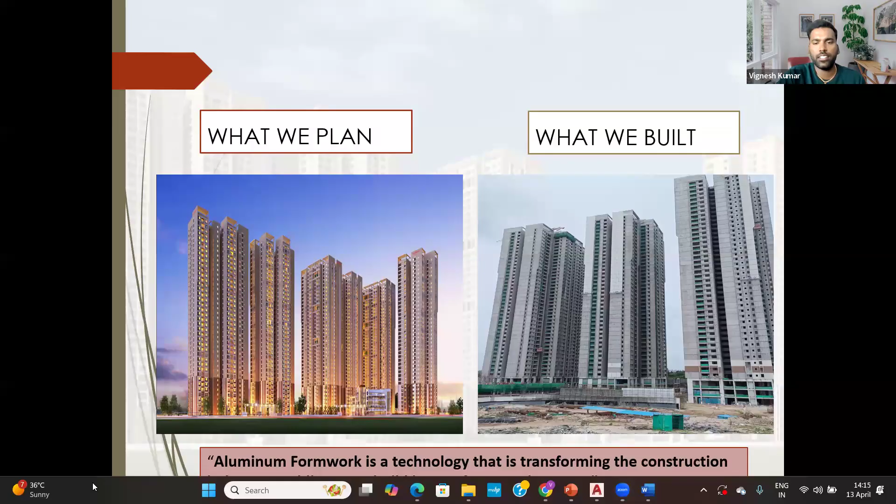About aluminum formwork: the aluminum formwork system is known as a monolithic formwork system. In a monolithic formwork system, we can do the walls, beams, slabs, and staircase at the same time of concrete. In conventional formwork, you do the wall or columns first, then the beam, and then the slab and staircase separately. But in aluminum formwork system, you can do everything together, connecting the whole floor in a single shot.

It provides good precision, consistency, and durability, meaning the panels are fixed sizes, so there are no deviations in dimensions, and you get a product as received from the panels. Aluminum formwork is also eco-friendly for sustainability. It gives around 200 repetitions for a single shot, and we can get maximum repetitions, which is the main advantage of aluminum formwork.

They are lightweight, which makes them easy to transport and install. In the market we have steel formwork, plastic formwork, and conventional formwork, but compared to those, aluminum formwork is lightweight, around 21 kg per square meter nominally. That's not a big weight for the workmen, so it is easily installed and used in an easier way. Aluminum formwork is an alternative solution to conventional formwork for sure.

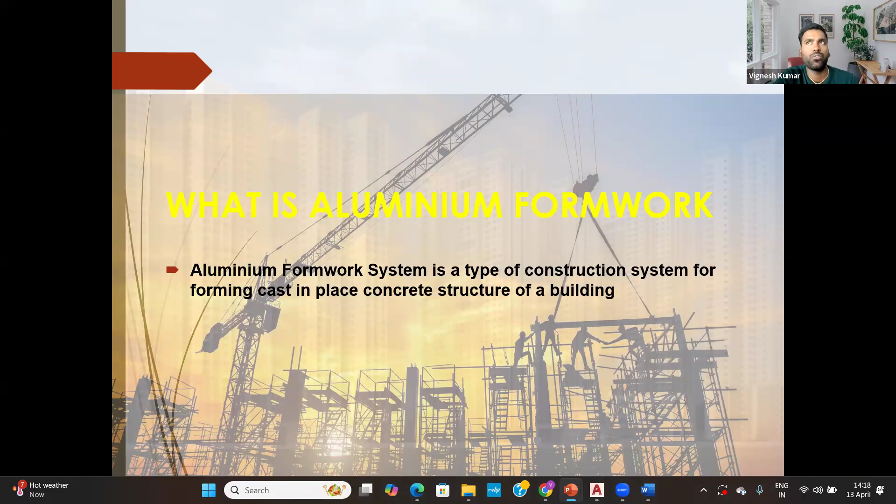If you are doing a high-rise building, it helps you complete the project faster and in an easier way. This is the definition of aluminum formwork: it is a type of construction system for forming cast-in-place concrete structures of a building. We know formwork is a shape or mold which gives the structure its shape.

These are the main factors for deciding on aluminum formwork. Number one is cost saving - nowadays, whenever management is asked, the first point that comes up is cost saving. The second is high speed, third is superb quality, fourth is safety, and last but not least, eco-friendly. These are the main five factors you can carry forward in aluminum formwork. If you provide cost saving and high speed, the balance two points - quality and safety - will be covered if you do it the right way on site.

In the cost saving factor, we can get 200 times of repetitions since all panels are molded, so you don't need any changes. The second is high speed - if you are doing a project with a 3-year span using conventional formwork for a 30-floor building, it will take 3 years for RCC itself.

So when will you do the finishing works, and when will you hand over to the customer? For that, aluminum formwork is the best alternative to complete the project at a fast pace, because nowadays people need everything on time or before time. That is a main factor among Indian customers or NRI customers - they expect the flat to be handed over before the time. That is the current market in Hyderabad, not other cities.

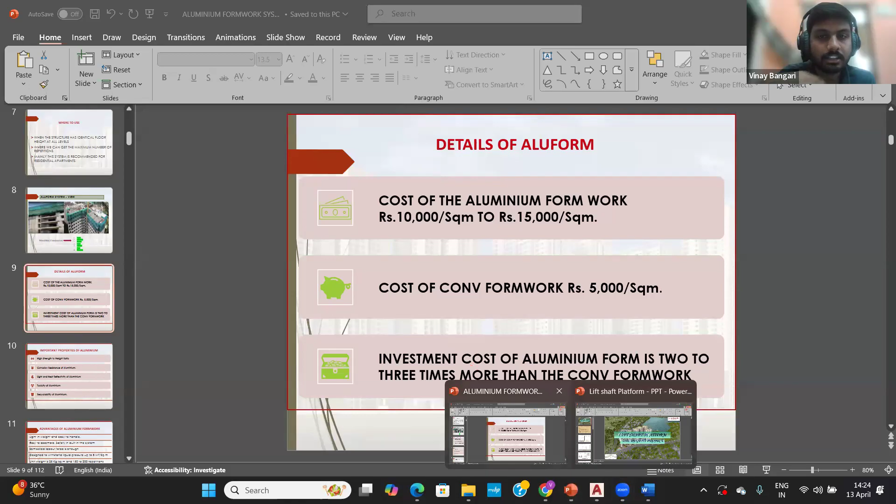Can I leave? And again, no, sir. No, sir. Only screen sharing. You can, okay. Stop the screen sharing and you can share it. We have to edit the settings. So done. Now it's gone. Yeah.

And the important properties of aluminum are high strength to weight ratio, and you don't get any corrosion. If you are using a steel formwork, there will be a factor of corrosion, and there is a fear in the rainy season, monsoon season. But you don't have any issues in aluminum formwork because you can work in monsoon time itself, and it's light with high reflectivity. Aluminum is recyclable, so we are helping eco-friendliness and sustainability as well.

So firstly, we covered advantages of aluminum formwork. These things we have already discussed: light in weight, easy to assemble. And the third factor is the main factor in the aluminum formwork industry: you don't need many skilled labors. In a group of 10 people, there will be 2 or 3 main carpenters. As per my project experience, out of 10, 2 persons will be skilled carpenters. Other than that, they are semi-skilled or unskilled workers only. That helps you to get more productivity with semi-skilled labors.

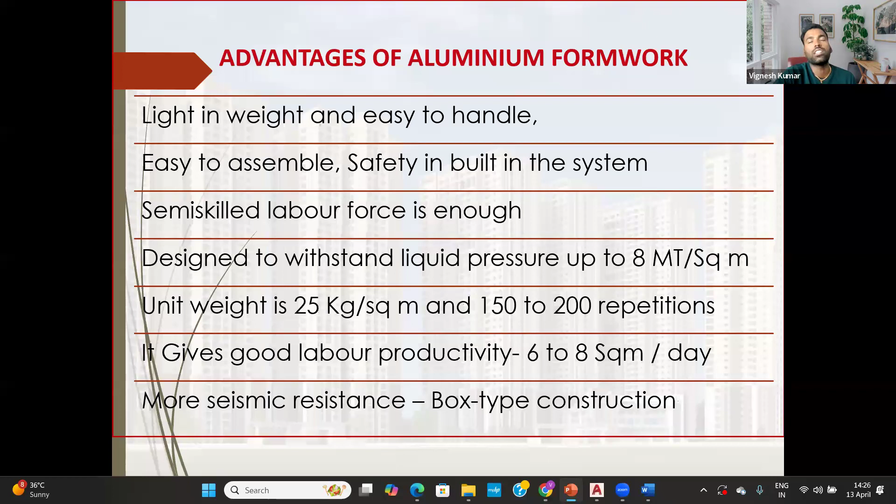And the initial setting of the formwork will take 30 days. It is between 20 to 30 days, based on your team, your technical crew, as well as carpenter crew. So we normally mark 1 month as the duration for initial setting, and the procurement will take 3 to 4 months because it is a time-taking journey. I'll share in upcoming slides what the process of procurement is.

So this is the first one, mobilization, what we call procurement. Firstly, we have to finalize the vendor because there are n number of vendors in the Indian market as well as the foreign market. In the foreign market, we can say Malaysia and Korea are the topmost providers for India in aluminum formwork, and we have n number of Indian vendors as well. The vendor is to be finalized as per their performance and reputation in the industry. If you are in Hyderabad, you can visit any of the builders. There is one name, MFE from Malaysia. They are the number one provider of aluminum formwork in Hyderabad city.

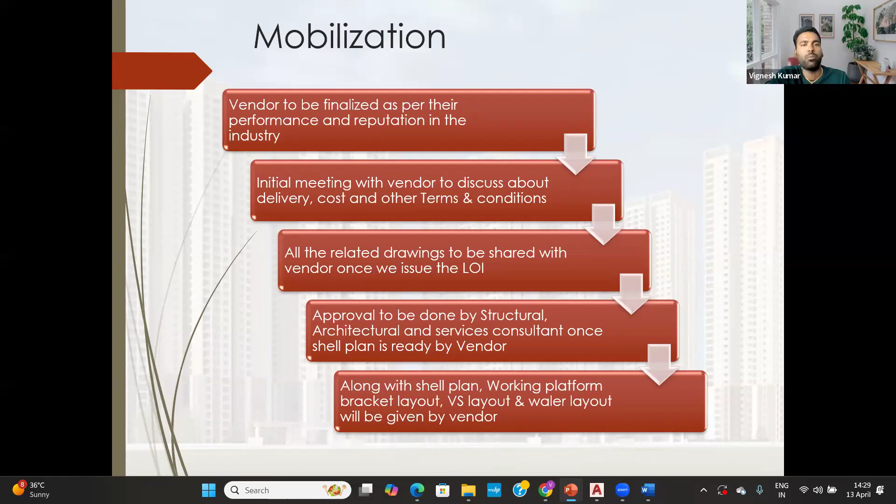Shell plan is nothing but a layout similar to a structural layout: wall thickness, beam sizes, slab sizes, room to room sizes, door and window sizes, all marked in the shell plan. After the shell plan, it has to be approved by our technical team, our architect or structural designer, who are the design drawing authority. If you have a CEO who is the design and drawing authority, he has to approve.

Then only they start the production of aluminum formwork. That's what I shared, it takes 4 months time. So you have to meet the vendor, you have to finalize the drawings, then only he starts the fabrication of the panels for your particular project. Those will be packed in boxes. Means if you have 8 flats, it will be packed flat-wise.

This is my project's mobilization data. Material shipment details from vendor factory to origin site as follows. The vendor, MFE, has a factory in Malaysia. By road, they shift it to the port, Port Klang, Malaysia. And then from Port Klang to Mumbai port it will be shifted by ship. This takes the maximum time because of the ship.

You don't know the weather condition, you don't know the ship arrival time. If it's supposed to come in June, it may come in August. It may come in May end also. So that is the factor you have to think about before starting the foundation itself. You have to procure your aluminum formwork for a typical structure. And then from Mumbai port to Sanath Nagar, Hyderabad, and Sanath Nagar to project site.

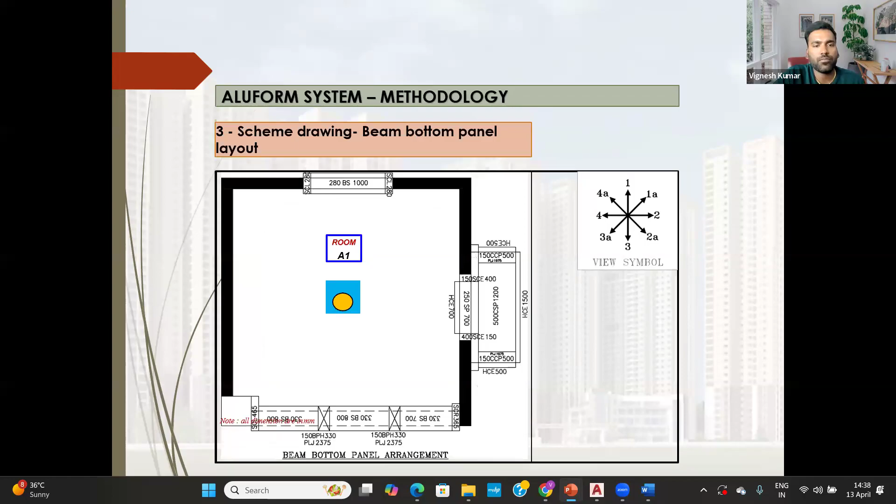This is the wall panel layout. This is for beam bottom, and this is beam side panels. So you provide full wall panel here, and full wall panel here. Here is the beam. There is a window. So you are providing a beam bottom for the window and the beam side for that window, so there will be an opening for that window. And again, this is a slab panel layout. Here, this is the soffit corner.

I'll show you that identification later, because you should know the drawing first. Only then can you know the components. Without knowing the drawing, simply knowing the system and the components will not work. Engineers working on site, in planning, projects or PMC, you should understand the drawing first. The first thing you have to know is the drawing. If you know the drawing, you can face, challenge, and fight for anything. Okay.

And this is the slab panel layout. This is not required. This is the bracket panel layout; we'll come to it later. So this is the section. I'll show you slide number 1. From here you are seeing. Everyone, please focus on the slide. You are standing at the yellow mark, room number A1, looking in direction number 1. We'll show you the section of that.

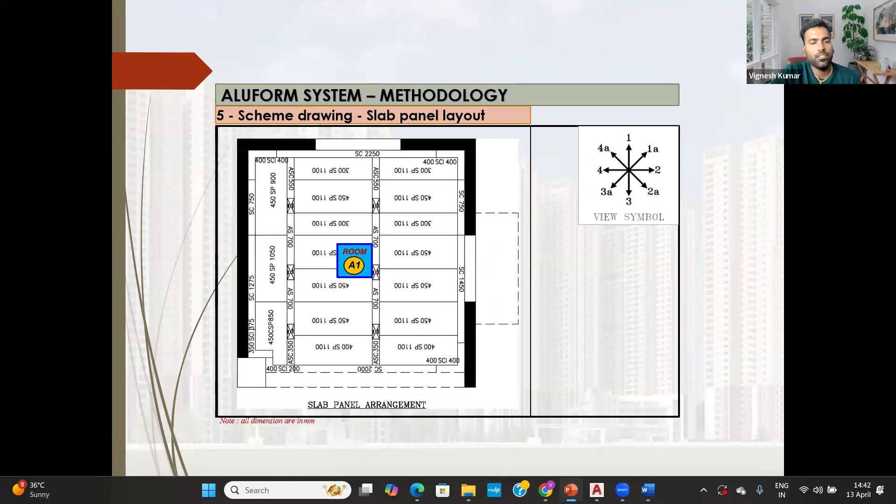Sir, what are the dimensions shown in the drawing? Yeah, it will come in millimeters only. These are the sizes. We don't use feet or inches in high-rise towers in aluminum formwork. That is universal for aluminum formwork vendors as well as the Indian market.

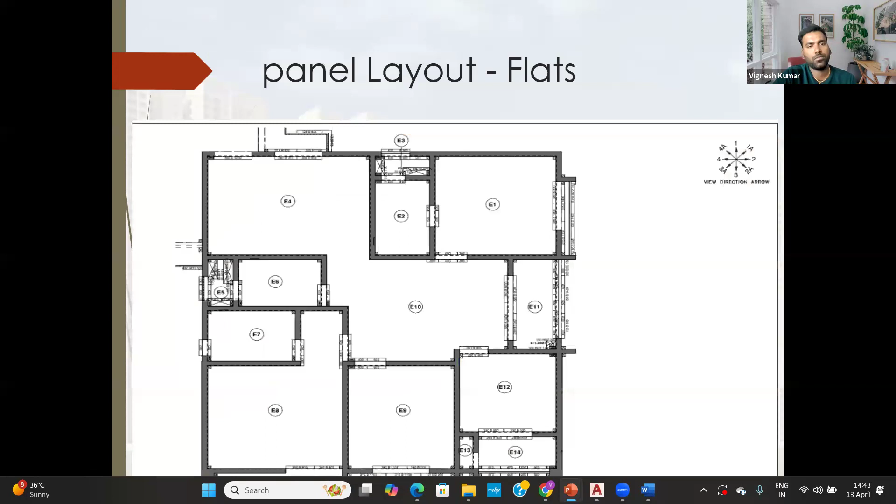So you know the drawings. You fix the vendor. You have to go to the site. These are the drawings I have said: structural, architectural, MEP and services, cell plan and modulation drawing. These 4 things will be required for any high-rise towers, any villas you are doing with aluminum formwork. You have to have these 4 drawings at your fingertips. You procured the aluminum formwork, finalized the vendor, got the drawings, studied the drawings. Now we are going into the site.

So this is our project's initial stage photo. These 3 levels are basements, B3, B2, B1, parking level. And from there, we have started our aluminum formwork. Is it visible inside the net? Yes, sir. We have an external formwork system with brackets.

Actually, there is another system also, the windscreen or safety screen system. People are using it in Mumbai. Nowadays in Hyderabad also, My Home and other builders are using that safety screen system. That is also beneficial and safer. In our bracket platform itself, we can cover the entire tower by providing a good fully planked platform. So this is the main thing.

If you have to achieve the 8 day cycle time or 6 day cycle time, the first priority is safety. Safety is the eyes of your project. If you put your finger in your eyes, it will collapse. It will not be a good sign for your project. So always follow safety. Safety is the first priority for any high-rise towers or any projects.

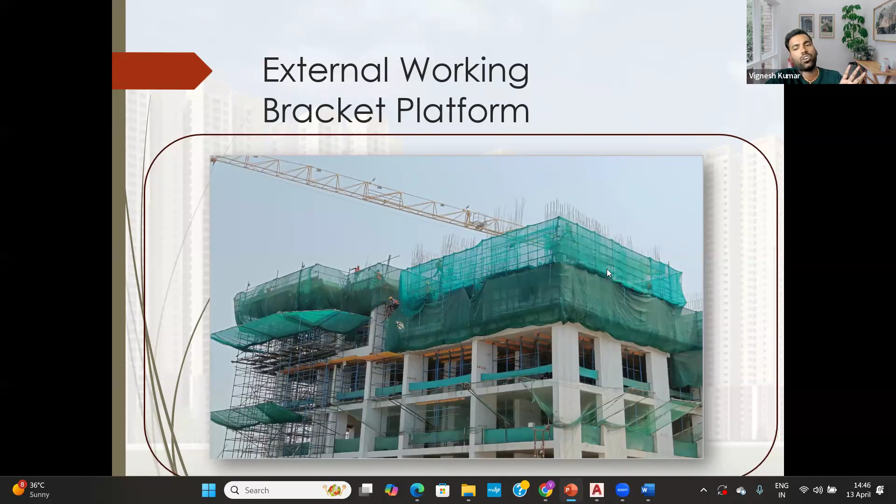So I'm covering working platform. Working platform is the safest, fully covered one for people who are working inside the buildings. You can imagine you are standing here at the 39th level, almost 180 meters from the ground level. So you can't see the outer side. Some people have height issues, right? Height fear issues. So if you are standing here, you don't have to worry about the outer side, because we have a fully covered working platform that will ensure your safest working area.

Coming to working platform. This is the scheme for working platform. Here you have a below level wall and below level floor. For example, this is the first floor and this is the second floor. This is the first floor roof slab, means the second floor slab, and this is your first floor. You are standing here. In the scheme drawing you have inner wall panels here. You have outer wall panels here. You have provided a fully planked working platform here, and you have covered it with the extension and safety net.

This is what it looks like. This is the inner side of the project. This is the outer side of the building. If you are standing here, you don't have any fear issues or any other thinking in your mind, because we have fully covered with the walkways and we have provided 5 steps of layer protection with safety net. This is looking good, right? So you have to give confidence to your working crew. If you are providing a safe working area to your workmen, they will give you blood and sweat for your project completion.

This is the procedure for bracket platform fixing for wall and slabs. This is your slab areas. This is your chajjas, means your sunshade slabs. So we are providing slab mounted platform for these slabs and wall mounted bracket platforms for these walls. So we have 2 types of brackets. One is wall mounted brackets. One is slab mounted brackets. After the fixing of the brackets, we have provided fully planked walkways with external protection.

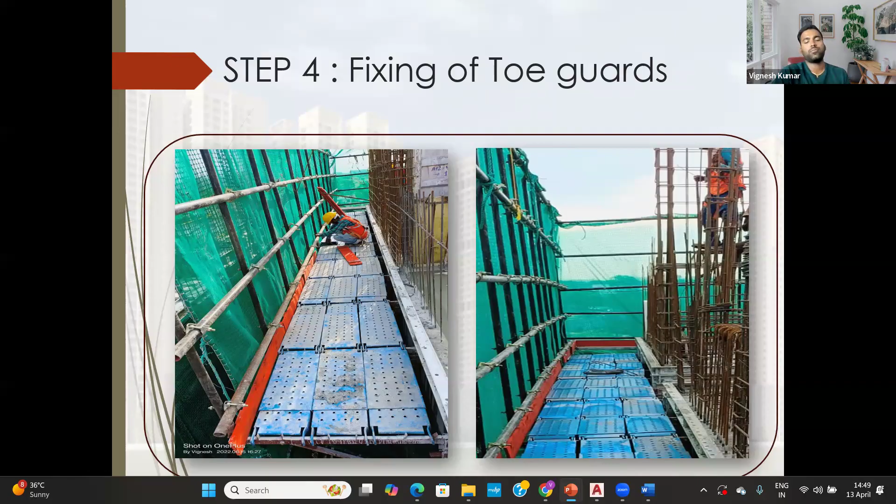And the inspection of the same is done along with the site team and EHS department. These are the checklists we have to follow, and we are currently following, whether the working platform is safe or not, and all the components are covered or not. Then only we proceed for the working areas, means the reinforcement gang, shuttering gang and Kalasi gang. So if you have any questions or anything I didn't cover in external platform, you can ask.

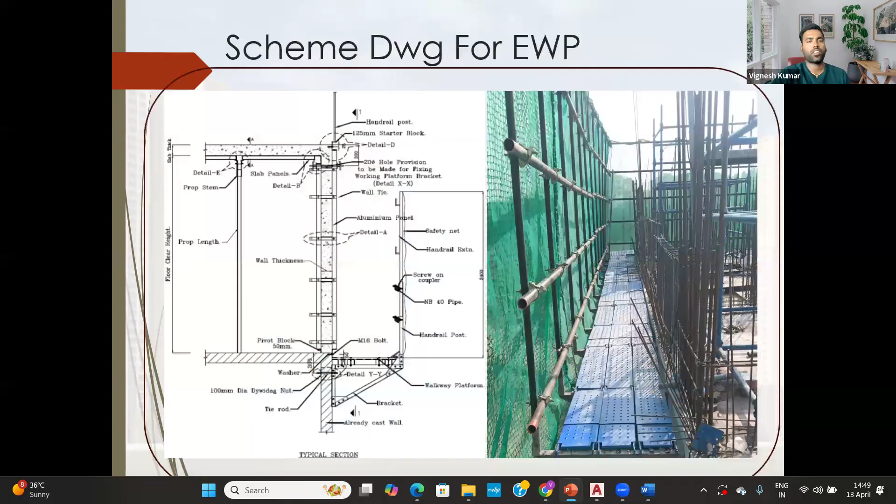One request to everyone. Please be focused on the screen, because for the next 10 to 15 minutes it will be slightly boring, because there are n number of components in aluminum formwork. If you feel it is getting boring, I will move forward. If you have any issues, you can raise your hand.

Okay, first one is rocker. The rocker is the thing at the bottom of the wall panel. I can show in the scheme. Yeah, this is the one. You can see a 50 mm line is there. There is a cross here. This is called the rocker. It's the base of my aluminum wall panels from the slab top. After the rocker, you will have a wall panel. This is the rocker, and this is your wall panel.

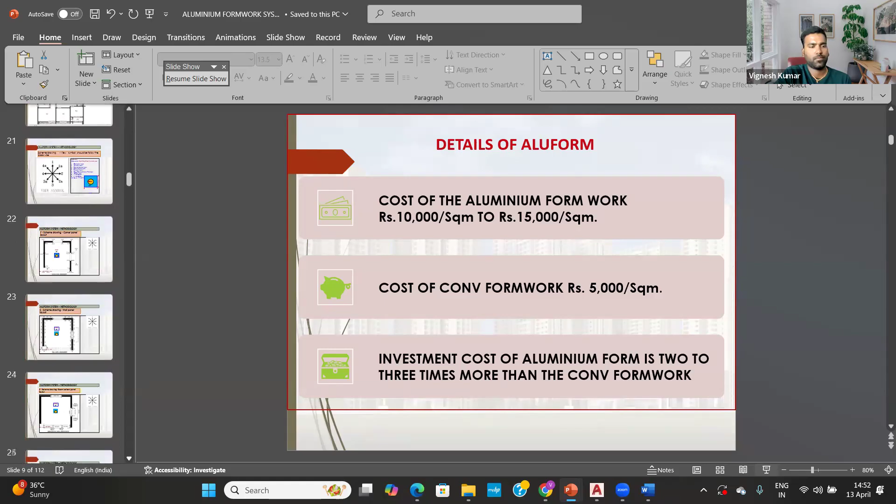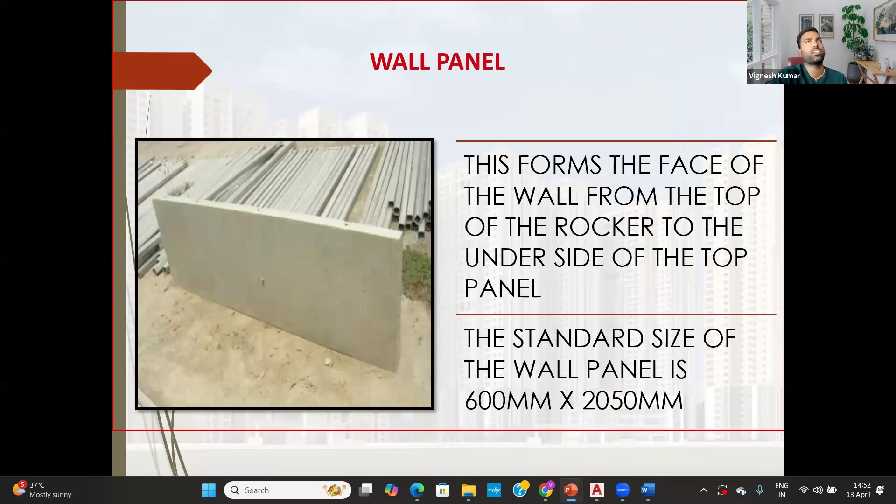One thing I have to add. Now if you have a 3 or 3.1 meter, you can go ahead without wall top panel, you can go in a single shot. If you have a beam depth of 600 and your slab to slab height is 3 meter, you can go with a 2.4 panel. We are doing it that same way because 2.4 meter length is good, people can handle it easily. So it's based on your floor height. If you have more than 4 meter or 3.5 meter, you have to go with top panels.

The next one is kicker. Kickers will come over the external wall panel, meaning you are providing the wall panel here. You have provided the inner side wall panel, and there is the outer side wall panel. Above the outer side wall panel, you will fix the kicker. I will show the kicker usage in the next slides. Kicker will be your base level, meaning that is your starter for your next floor. Keep that in mind, kicker is your starter of your next level slabs.

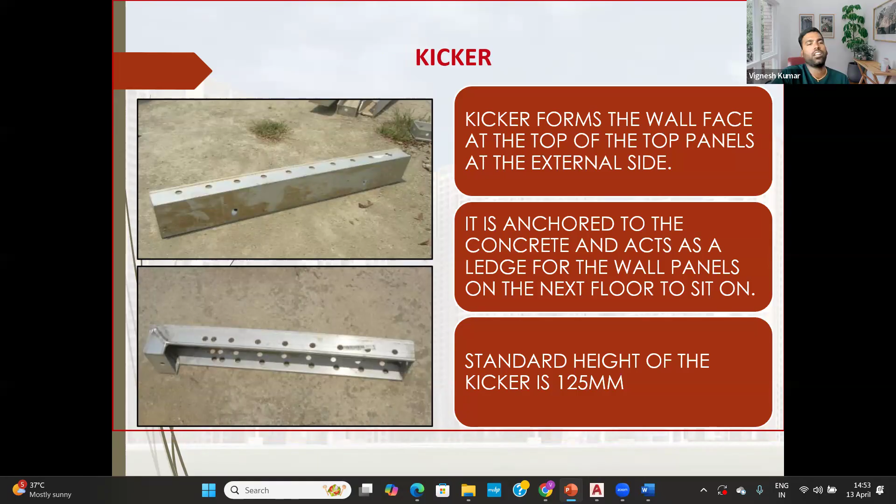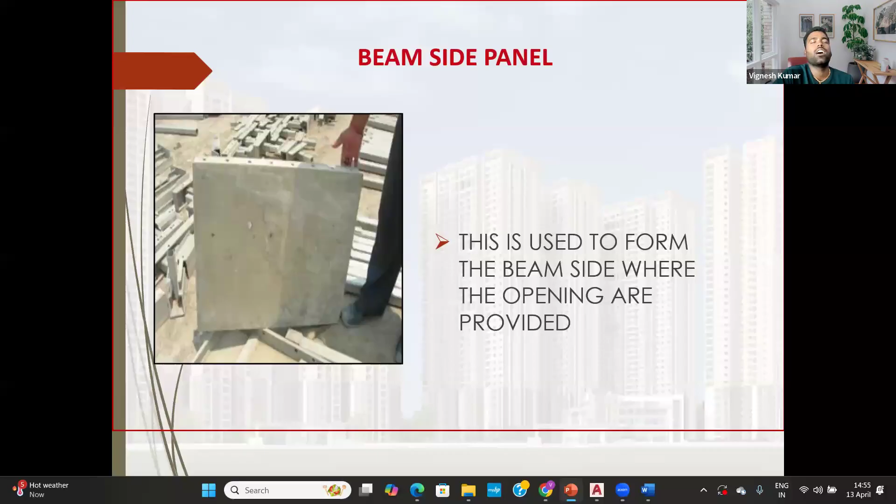Why does no one ask what is the difference between T panel and beam sides? Both are the same size, no? In T panel, you have to connect with that wall. In beam side panel, you have connected with your beam bottom. That is the difference. And this is the prop head or beam soffit head that will connect your bottom. And this side is used for the window.

You have a window here, right? You have a window here. You have a window here. Assume here is the window. So both these sides are vertical panels. You have provided the bottom. So wait a minute.

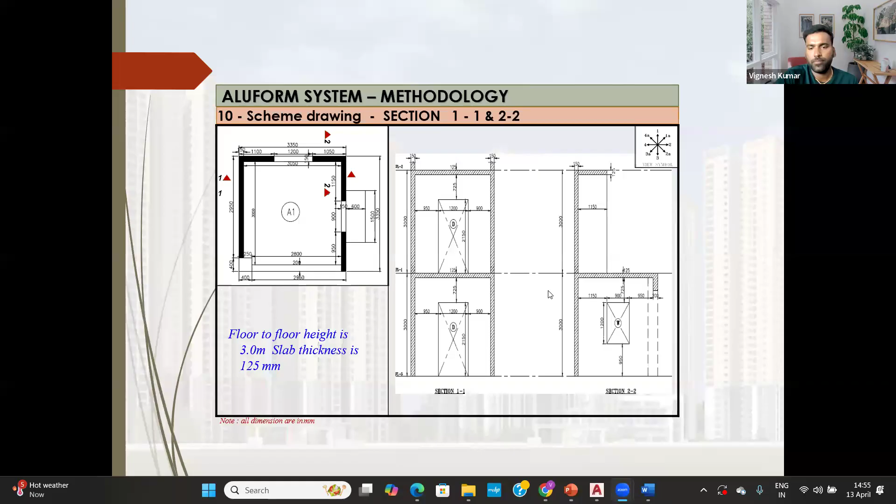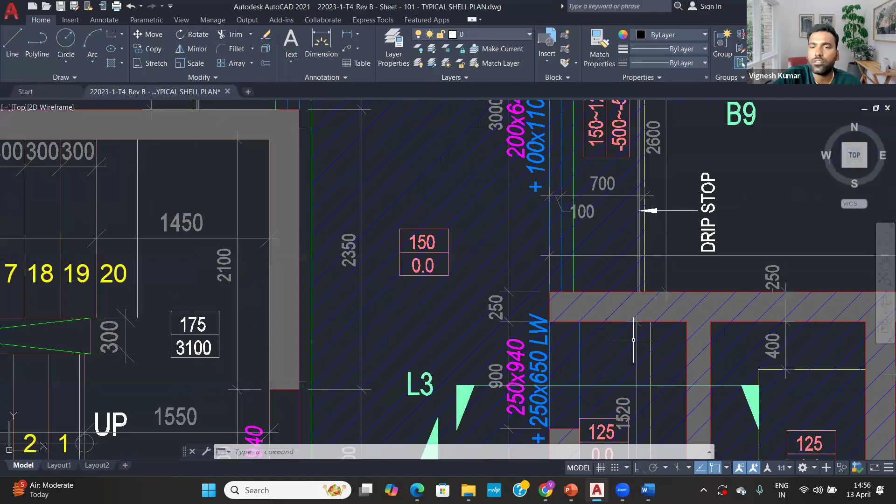I can show you in the drawing. See, this is one shell plan. This is one staircase, particular staircase. Here there is a door opening, there is a beam. So for the bottom, you are providing the beam bottom here. Side panels come over there. Everywhere you can see it.

Clearly they mentioned it in the shell plan itself. Which means this 250 and 650 LW means you have a door opening or window opening here. 250 in size means the thickness of this pardi is 250, and 650 is the height of that pardi. LW means lower wall, and 250 by 940. The different mark is your beam. Your beam size is 940 in height, 250 in size.

So by seeing the shell plan, for example, there is one unit from the main door, you are coming, this is the hall. There is bedroom number 1, bedroom number 2, and there is a master bedroom, kitchen, and utility. So here you can see everything. This is a beam size 180 into 640, beam size here they are given. They mention the wall thickness sizes and room to room dimensions. You can get it in an easier way by seeing the shell plan. The slab thickness is 150.

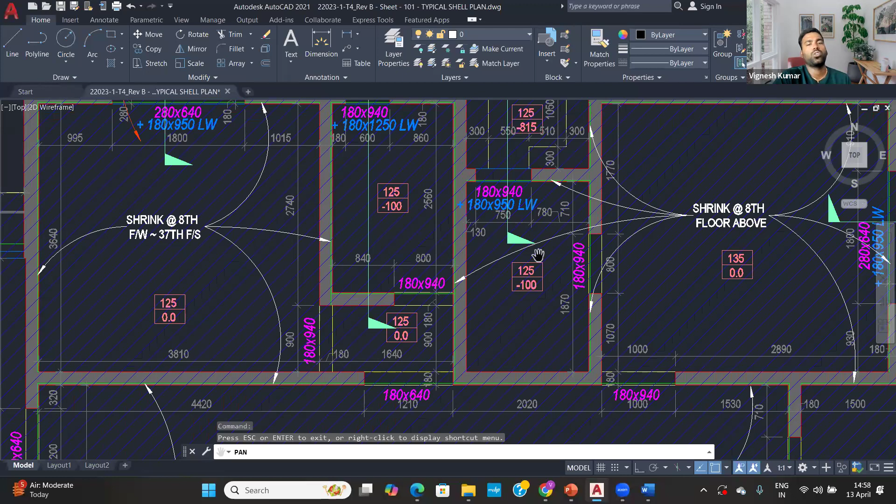For sunken slab also they provide the details. The sunken slab thickness is 125, but it will be minus 100, because it's a toilet sajja, so it will be minus 100 from the original slab level. So they mention that too. These are the things you have to see in the shell plan. By studying the shell plan and modulation drawing, you can cover the entire panel systems. Okay, we'll move to the presentation.

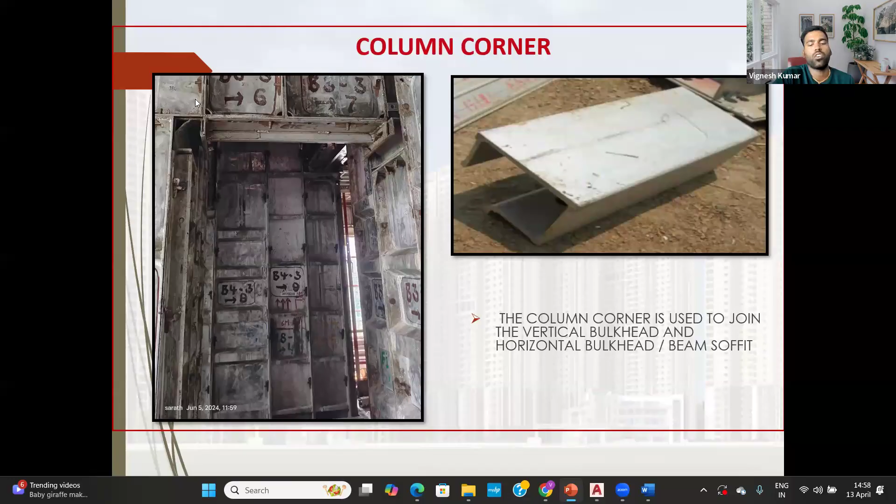I'll show you in the deck layout. Next, we move to deck layout. I will show stage by stage. This is types of deck panel systems.

First one is the deck panel, right? This is your deck panel, the piece you can see now. This is the deck panel, and the next one is deck prop.

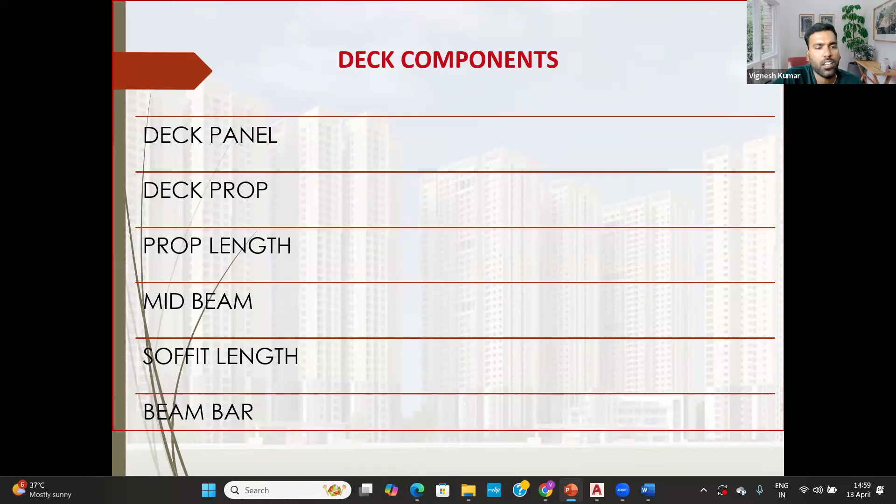I'll come to that later. And mid beam - mid beam is nothing but a connective longitudinal section here, between the two panels, and this prop head. This is called prop head, 100 by 100. It will remain in the below floor itself. This is mid beam, which will connect both side panels. Like wall ties, the mid beam will be connecting the things with both panels.

Anyone can say what area this is, which photo is this for which room? It's for passage, I think, sir. No, it's for a hall area. You are coming in from the main door. This will be an entrance for kitchen, and this will be entrance for your bedrooms.

Along with that, I have to add one thing. You can see the photo, right? This is the bottom alignment spindle for alignment purpose of base level. And the soldiers will ensure soldier or square pipe will ensure your alignment thing - meaning if there is any undulations, it will be covered. And the connecting square pipe, which will be called Taylor clamp or C clamp.

Obirato raised hand. Yes, bro, tell me. Hello. Obirato, you raised your hand, brother. Yes, sir, that time you questioned that, sir, about the drawing before the slide. Oh okay, for answering.

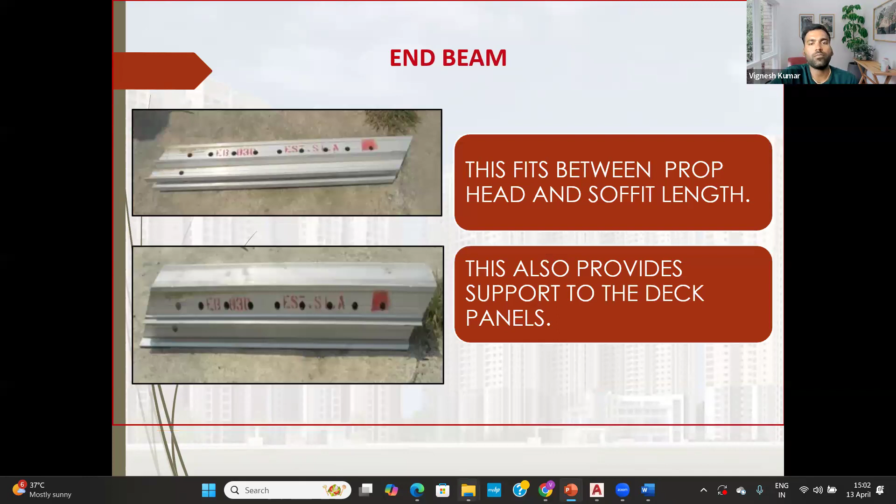So you can see this mid beam and end beam, there is only one difference. Mid beam comes between two panels or two props. End beam will cover one side with wall panel, one side with your prop head. That is the difference, that's it.

And this is the soffit length. Beam bar, I have told you, beam bar will connect each other side, MB and your props.

And till now we have talked about procurement process, bracket platform, safety bracket platforms, and the components in aluminum formwork. So now the real factor is what we are going to do in site. Everyone can talk, everyone can say I will do this, that, and all. But doing it at the site is the difficult or challenging one for every site engineer, every civil engineer. So we have provided a platform.

We'll move on with the first setting. You have received your container, okay.

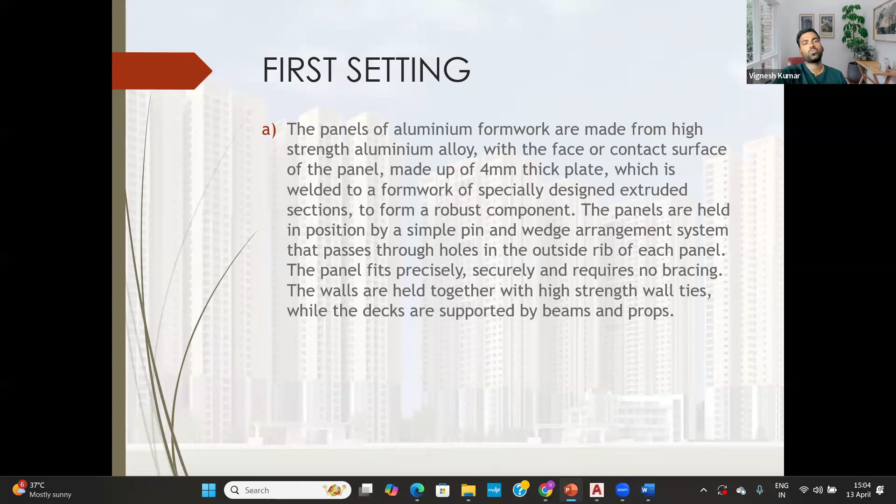Before going for the first setting, we have to ensure these factors. There are 5 or 6 factors you have to ensure for a particular vehicle unloading point, because sometimes if the container arrives in the morning, it may be unloaded 2 or 3 days after. That will delay your initial setting cycle time. And you have to have enough area for stacking the materials.

Else you have to differentiate or segregate the panels flatwise. If you have minimum space, like in Mumbai city, you have to segregate flatwise and lift them to the top level. So we are going to segregate zone wise, as I shared, no flats.

Hello sir, good afternoon sir. This is Prashant here. Sir, sorry for the disturbance, I have a little suggestion, a query for you.

How do you ensure the quality in this aluminum formwork, sir? You are talking about the quality of the aluminum formwork panel system, yes. You can go with third party labs for its content, the aluminum content, and what alloy, because we are using 6061 T6 alloy grade of aluminum. So you can check that by giving it to a third party.

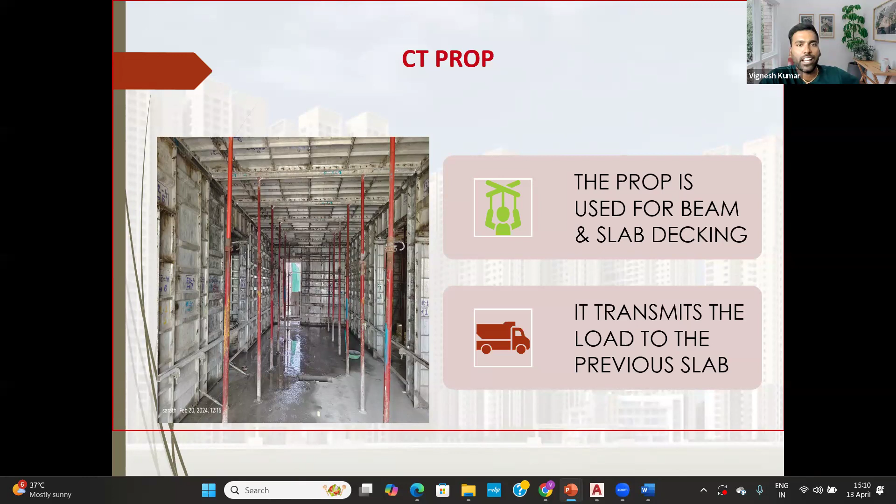One more person asked, why, sir, do you have to wait for 4 months? If you need a good biryani, you have to go to a good hotel. That's it. Please continue, sir. Sorry for the disturbance.

Sir, one more thing. For vertical, will there be any checks for aluminum? Yeah, I'm coming to the next slides. The next one is fully from site itself, from starting of the Mivan panel erection till concrete and the de-shuttering also. So you will get all the answers for those questions. Any questions?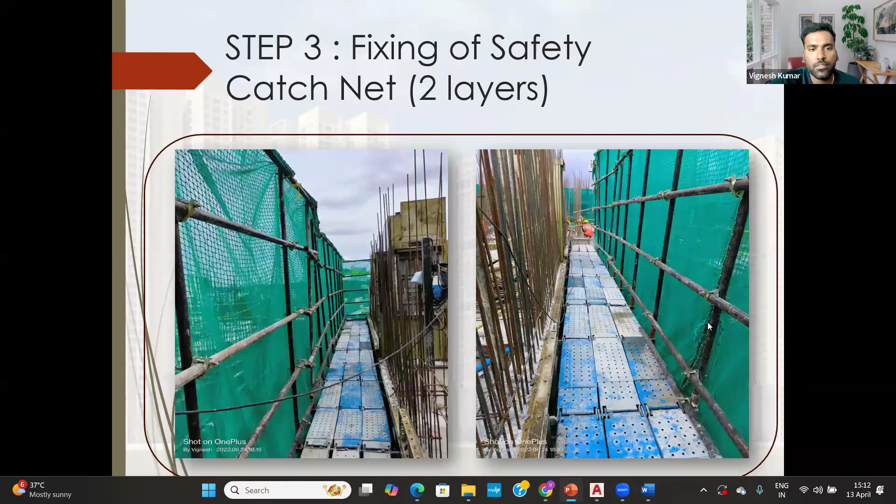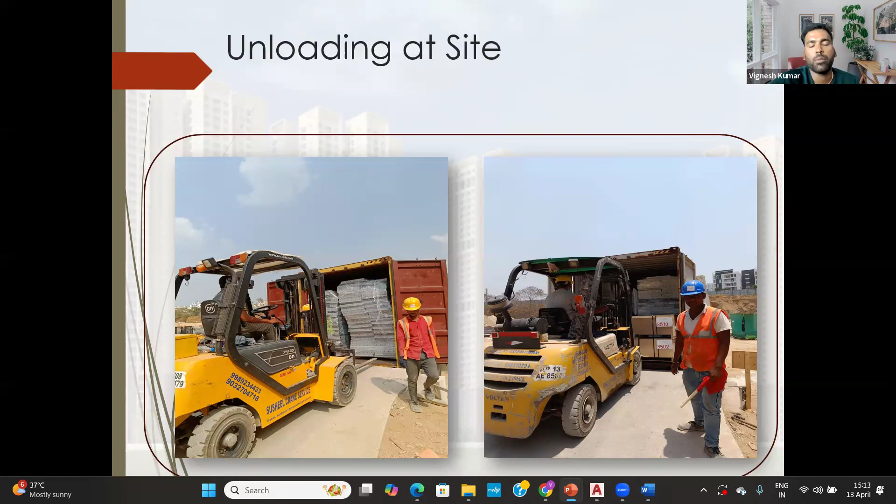See, this is how we have segregated. We have completed our 3 basements and received our materials. We are segregating the items zone-wise. Workmen are segregating item-wise, by panel sizes and lengths. Segregation done. It is ready for lifting to the live floor.

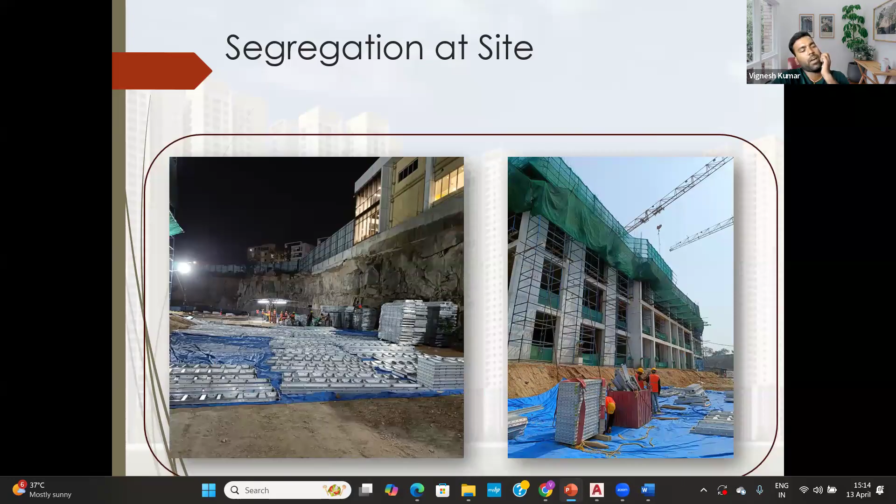So you have received your panels and materials, and the segregation is done. Now we are going to fix the panels and do a slab. There are 3 main stages of aluminum formwork: pre-construction stage, during construction stage, and post-construction stage. We'll cover these in the next slides. Firstly, the pre-construction stage.

Someone is asking, how do you know if there is any deviation? We have a surveyor with the total station. He will provide the coordinate points, for the door, for the particular wall, 300 mm offset points. After the concrete, we put a line dori and check with the main walls whether it is correct or not. If there are any deviations, whether we have to joggle or do other things, we get to know.

So this is the first step. For any aluminum formwork, not only aluminum formwork, for any building, the basic thing is you have to ensure your base points correctly. Then only you can proceed with other things.

This is what we call a Teshi ply, setting out in English, but Teshi ply we call it. We have provided a 300 mark. We have fixed that 100 by 150 plywood after the wall cover, meaning 40 mm, 50 mm, whatever cover dimension you are getting in your drawing; you have to provide it in wall corners and wall end areas.

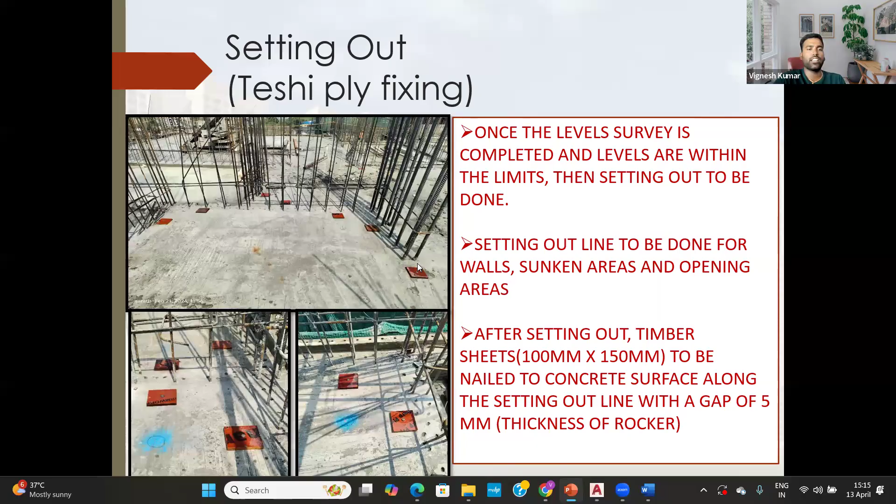So setting out is done, base points are given. You are going to tie the wall reinforcement as per drawing. See, the walls and beams, everything will be covered in a single day, meaning everything will come under one roof. Walls and beams will be covered on the same day. And next we are going to do erection of wall formwork.

So you have done your points, you have checked it correctly, you have done your reinforcement works, and you are going to erect the wall panels as per the scheme layout, which we have discussed. Room number A1, direction number 1, direction number 2, direction number 3, direction number 4. So these are the things, providing the wall panels as per scheme drawings. Okay, you are providing inner wall panels. Here aluminum formwork works.

You have electrical conduit points, right? These are the switch boxes. These are the light switch and TV cable, LAN, everything will come under the wall panel itself. See, people are working. These are the MEP provisions for sleeves and all. You can see the wall tie here.

See, it will be at a spacing between 600 to 450 mm as per your aluminum panel designer. They give the details of the wall panel also. Every panel will be connected with wall ties. The only thing you have to ensure is that you put the correct wall tie and the correct dimension, and as well you have to ensure that the sleeve covers properly.

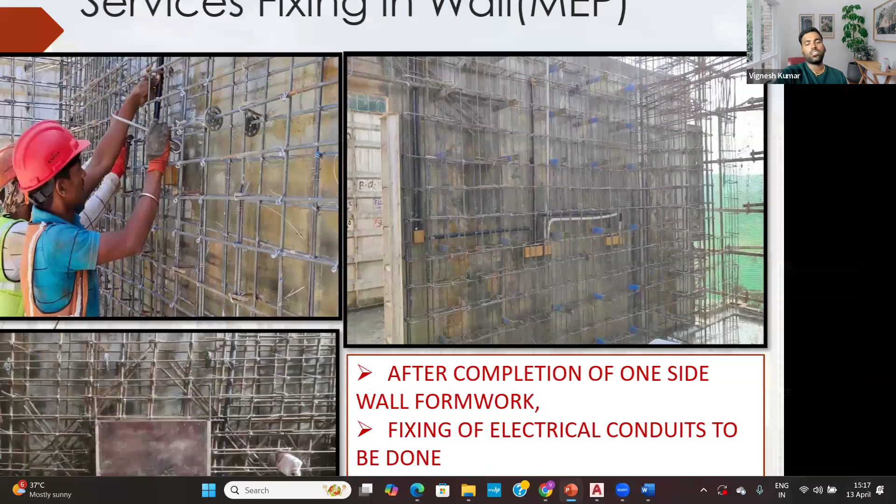So next we are going to wall tie fixing. So inner side wall panel fixing is done. We have provided the wall ties with PVC sleeves and covers. You can see, and we have provided the outer panels after fixing the wall ties. Actually, basically we will do inner panels and slab, then we come to outer panels. Only then can you get working space for carpenters. They can lift the outer panels from the top. They can sit.

Wall panels, inner panels completed. Fixing of beams: there is no separate activity like fixing of beams. Beams also come under slab. By doing the slab, beams also come along with the deck panels. See, he is connecting deck panels, decking the deck panels, connecting the mid beam and EB. This is the beam sides, chajja sides. He is cleaning the slab after the decking and applying shuttering oil, meaning releasing agent, for a smoother finish and good quality finish.

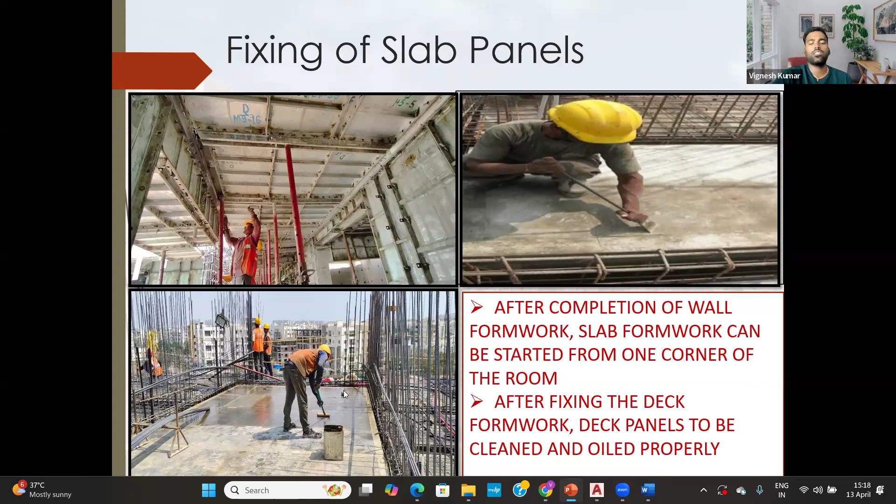So after application of oil, we are jumping into rebar fixing of the slab as per drawing. See, you can see hall, toilets, sunkens, and bedrooms. After the slab rebar fixing, we'll come to slab conduits. See, there are lines: black, white, gray, red, and one more color, green.

Black is for your mains, meaning lights, TV, those things, and white is for your LAN, internet, mobile, phone, and telecom things, and red is for your firefighting line, fire alarm line, and the green one is for your EVs, inverter and all. So that may be different. That is not a uniform one. There may be differences in the pipes used at different sites.

So we have done our wall panel erection. We have done our beam. We have done our slab. Reinforcement is done. Conduiting work is going on, and we can start the slab level. Anyone can ask: by doing conventional formwork, you have to do the shuttering of the slab, you have to level it first, and then you go to reinforcement.

For the same thing in aluminum formwork also, you have to ensure it before slab reinforcement itself. After some floors, meaning after 4 or 5 floors, the level will be the same only, because you are providing a correct, good top level. Your kicker is outside, so there is no need to worry about the levels, because that is the starter of your next levels. So we are doing it with a survey level and survey staff. A staff is checking the levels and ensuring that the proper level is given.

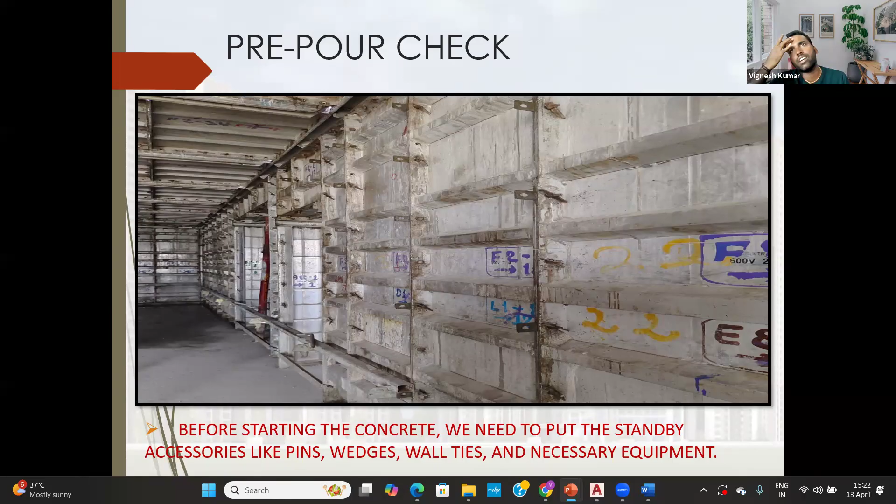Wall tie break will be a very rare thing. For our entire 40 floors, we faced it 1 or 2 times. That's it. For 1 tower only. So this is how it will look after your setup.

See, there is a mark. There is a mark, right? From here. This is building number B4. 4E means 4 external side. Panel number 1, 2, 3, 4, 5, 6, like that. So any skilled or semi-skilled labor will get to know where the panel goes, because 1, 2, 3 everyone knows. So this is how we are working.

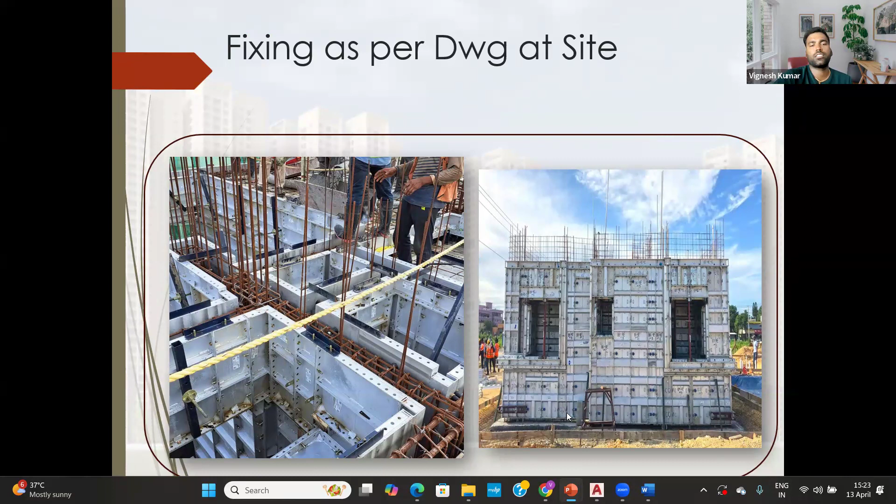This is during concrete. Malleting or hammering the external side, to ensure proper flow inside the wall. That will help avoid honeycombs or any other issues. And proper vibrators for proper flow. If you have congested steel, you have to use 25 mm needles, or else you can use 40 or 60 mm needles, to ensure proper finish and proper compaction.

This is how we are doing the slab level top finish. We have a reference level of 500 mm from slab top. Okay, we have a line thread. My mason will check whether it is coming at 500 or not. So from this we have 3 points. You are checking base level, you are checking vertical plumb, your kicker is on level. So absolutely your top level will be good and that will be perfect.

One thing I can ensure in aluminum formwork: if you are doing the practices and procedures properly, you never get any dimension issues. Till now, I haven't in my career. And after concreting, the main thing, you have to do the initial curing. Sorry. After completing the slab, you have to do the initial curing immediately, right?

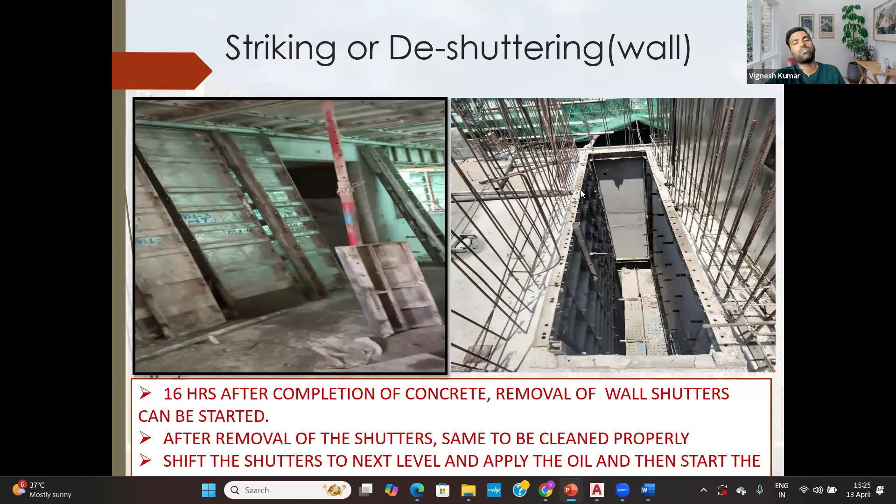See, I can remove all the panels. The wall ties are there, there is a kicker. This is the kicker for the outer side. So you remove these panels here and you are going to fix them at the level above. So there is hole matching. So there is no chance for any deviations in aluminum formwork if you are following the steps properly.

And the next one is striking of the slab. This will be at 36 hours or else 15 MPa. Can anyone tell what is the de-shuttering time for a slab in conventional formwork? Anyone can share?

7 days. For slab, it will be almost 21 days, sir. 21 to 28 days. About strength? 14 days, sir, conventional method. Yeah, conventional. Yes, sir. Around 14 to 21 days, sir. Yeah, exactly. That is the main factor we are following.

You have to revise your cement content, and you have to redo the mix design of your concrete according to the aluminum formwork, so that you will achieve 15 MPa in 1.5 days. Okay, so in 1.5 days you can do slab de-shuttering. See, after de-shuttering the slab panels, they don't disturb the prop height and props. This will remain the same.

Okay, this will be the below level. If you are doing the above level slab, this will remain the same in the below level. This is what we call left out props. These left out props will be moved to the third floor automatically. For example, this is your first floor, second floor you are working with aluminum formwork, and it will be moved to the third floor automatically. See, you can understand, no? You will remove the panels, the props and prop set will be there. After concreting the next level, this will be shifted to the top level.

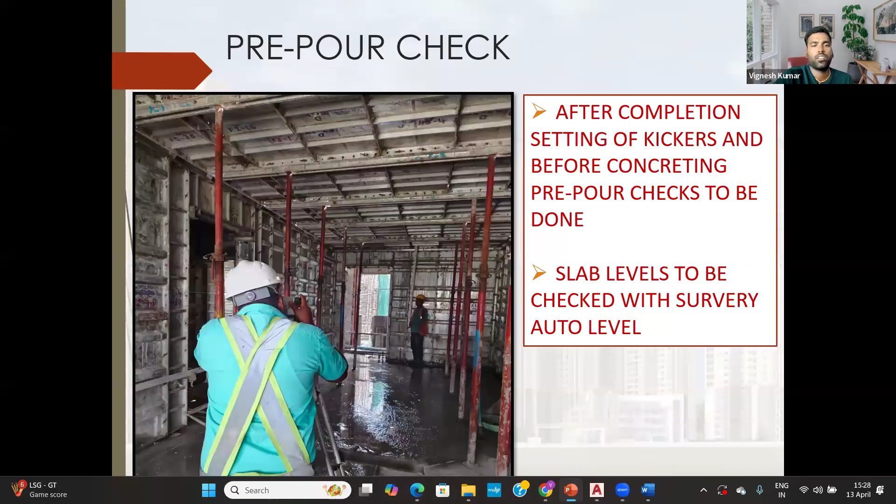So you have done your de-shuttering. One thing we are following is wall tie hole packing. You have provided the wall tie, right? So you have to close that too. With a nose plier, we are removing that tube, that blue color tube. This one. It's plastic, a PVC corrugated sheet actually. We remove it with the nose plier and fill with approved cement mortar, whatever packing material you have, for example Ultratech GP2 or PGM, power grade mortars, and we have our own mortars in Auro Realty.

Sir, can the PVC that is filled in the holes be used again above? No, this will not work. Okay, sir. It's one-time usage. If you fix it again, it will get damaged. If it gets damaged, your wall tie will break, inside the wall itself. This sheet costs 1 rupee. The wall tie costs 350 rupees. Okay, sir. So we don't want to take risks on this.

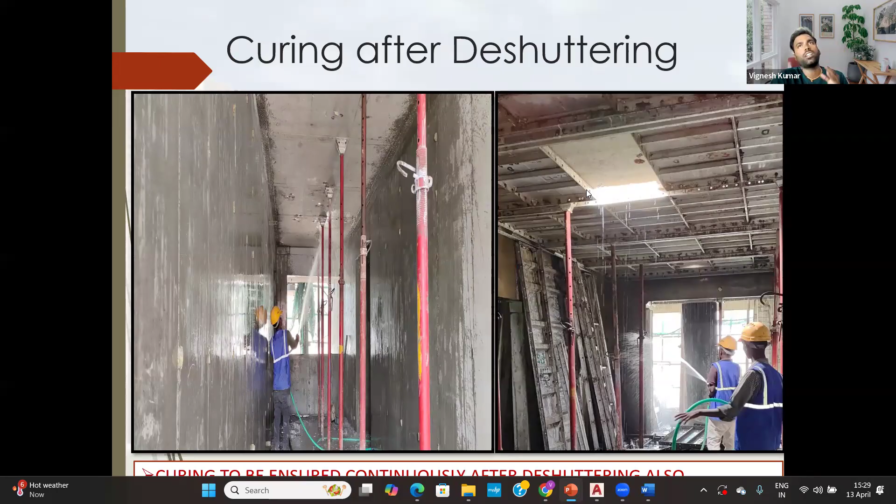Curing after de-shuttering. This is the main thing that as engineers we have to follow and ensure. After striking the walls and slabs, we ensure water curing for walls and slab ceilings as well. Because you are doing a faster pace of construction, you should follow quality and safety. Only then can you achieve your cycle time on schedule. This is after 60 repetitions.

It's a live project, my current working project. I think Vinay knows; Vinay can visit my site and see the product. So this is what it looks like. You don't need any plastering, anything. You can go ahead with direct finishing, gypsum, putty, paint, whatever you want.

This I missed actually. These red marks they are doing on the slab deck panel in the junction box areas. That's the electrical thing. See, here you are seeing the JB boxes, no? Here we mark with red paint. So after de-shuttering, I'll know where my electrical point is. For walls, the mold will remain the same. For slabs, we have to ensure we do the paint, only then can you get the details. So you have done de-shuttering.

Sir, do you have any photos related to the kitchen area? Kitchen area, because in the kitchen you will have a slab, no? Kitchen slab. What photo are you asking for? I was asking about the detailing of the kitchen area, how it is possible to make the slab there. I didn't get you. No, sir, normally in the kitchen, to keep the stove and all these things, we arrange a little slab, correct? Kitchen slab. So is it possible to make it with alu formwork? Yeah, definitely. But we didn't.

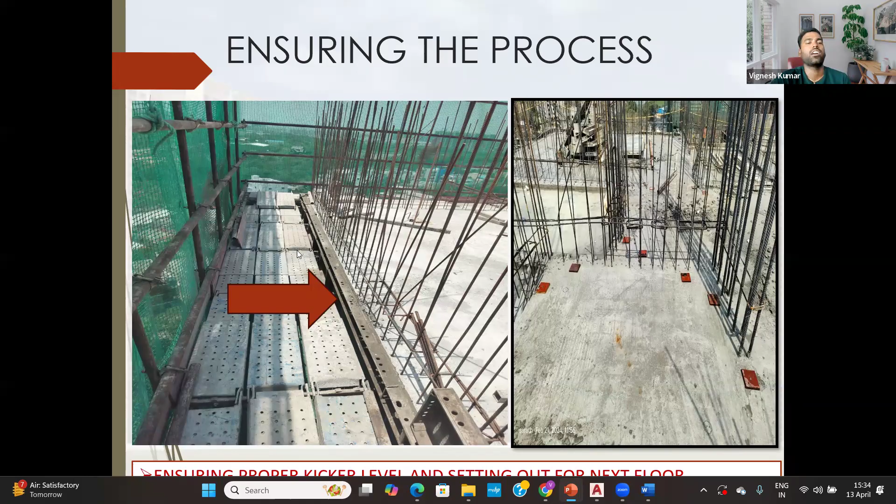So you have done your slab concreting, and again you come to the first step. You are doing marking and TC ply fixing. You have provided your working platform, and this is your kicker. We don't start any activities, not even rebar shifting, unless we are providing the external working platform.

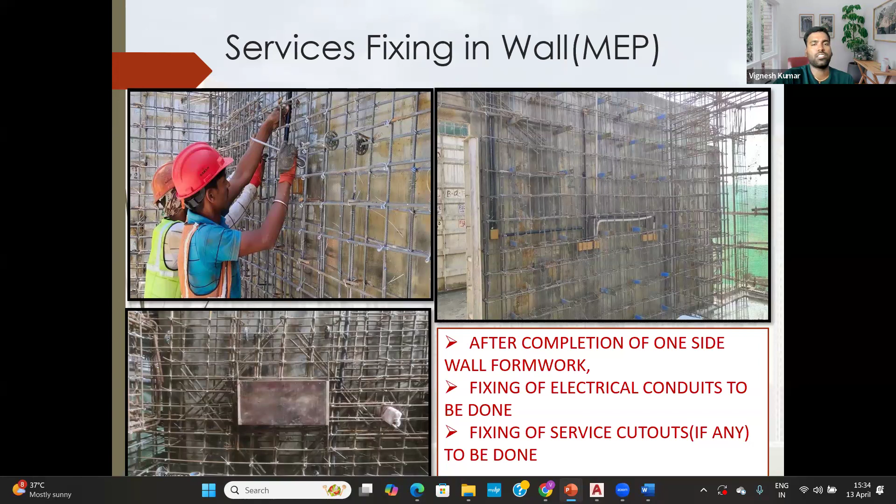So we have covered the main things. We have procured the materials, stacked them zone-wise and flat-wise, done survey marking for base levels, wall reinforcement fixing, wall panels, services in wall areas, beam and slab decking, slab rebar, slab services, and slab levels. We have ensured verticality, with deviation tolerances within 4 or 5 mm.

We are not allowing 5 mm; we are controlling within 4 mm. If you have more than 5 mm, you are going the wrong way, so you have to work it out and ensure it doesn't repeat. Because in aluminum formwork, if one room shifts, the entire set shifts, as all are interconnected. So you have checked verticality at bottom, mid and top levels, and you go for concrete. After concrete, we de-shutter walls in 16 hours, slabs in 36 hours, and wall tie hole packing is done.

Now we'll see some major challenges we can face in aluminum formwork. First, bulging due to improper fixing of wall ties. If you have provided only the stub pin and didn't put the wedges, it will bulge. Improper fixing of pin wedges leads to bulging, and improper fixing of the AC plywood near the kicker also leads to bulging. It will be minimal, but it is also a quality factor.

Next, leakage of cement slurry. If you are not doing water washes, the cement slurry will pass through the panel joints and come onto your lower floors. If seniors or anyone come across your project and see it from the outer side, doing that cement slurry wash is a basic, small thing. If you do it, the project will look very, very good.

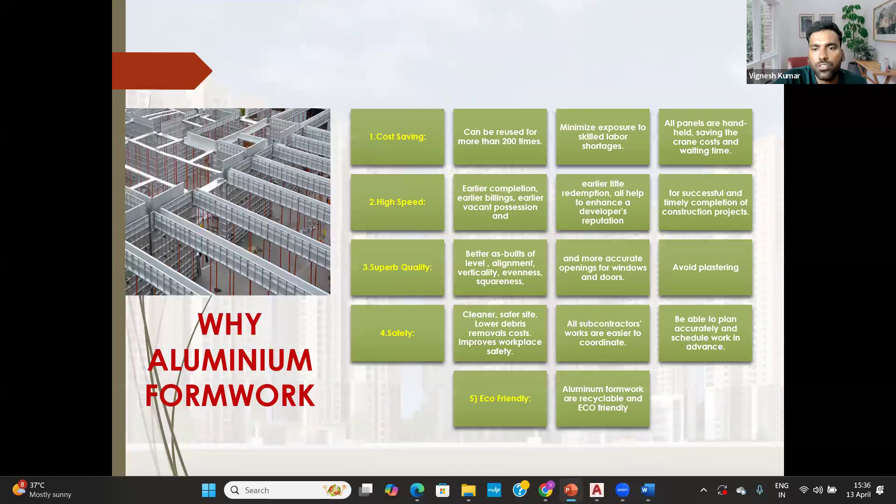Sir, from aluminum formwork, can we able to achieve circular shapes also? Yeah, everything you can achieve. See, okay.

We have done terrace. We are still there, painting is also going on, but there is no symptoms of cement slurry and offsets. That is the thing we have to ensure as an engineer, that we are following the correct steps or procedures or not. Then only you can get your product, or you can give the judgment to your aluminum formwork procurement.

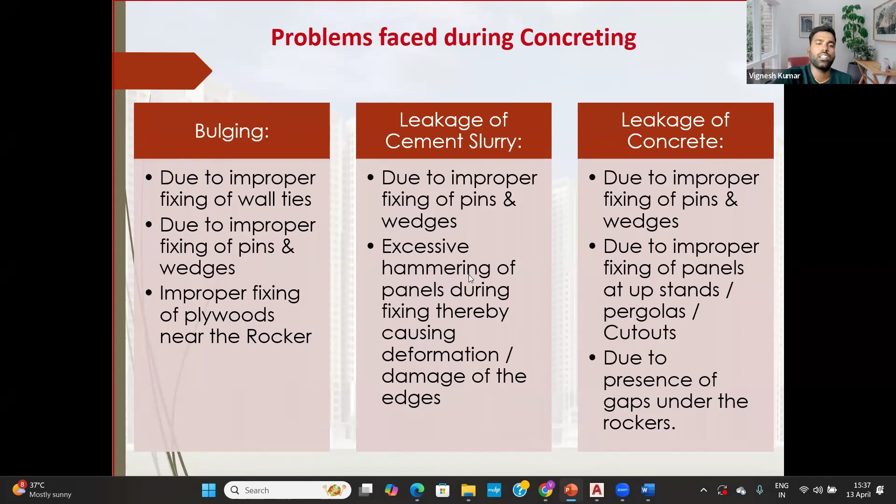Okay, and leakage of concrete, that we can ensure by providing all these things. And the malleting thing will be ensured without any honeycombs. See, there will be a cover over here.

There is a minimal slump, means they didn't provide a flowable concrete. It will get stopped here, so the concrete has not gone through the entire beam. Someone asked, sir, if you use that plastic sleeves again, so this will be a case. That will be damaged inside the walls. The wall tie will be getting stuck.

If you are not doing that proper top slab level by providing 500 mm reference, you are not giving the slab top level properly, there will be a gap between your wall panel and your slab top. So it will lead to cement slurry to your entire slab. So again, you have to put the manpower for housekeeping and all.

So these are the small things you can cover and you can ensure, so that there will be no rework or recast for your company and for your project. Okay.

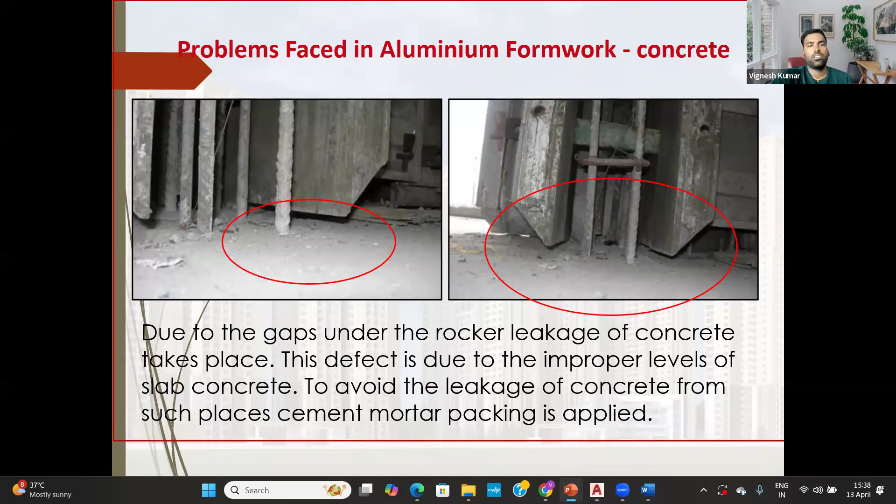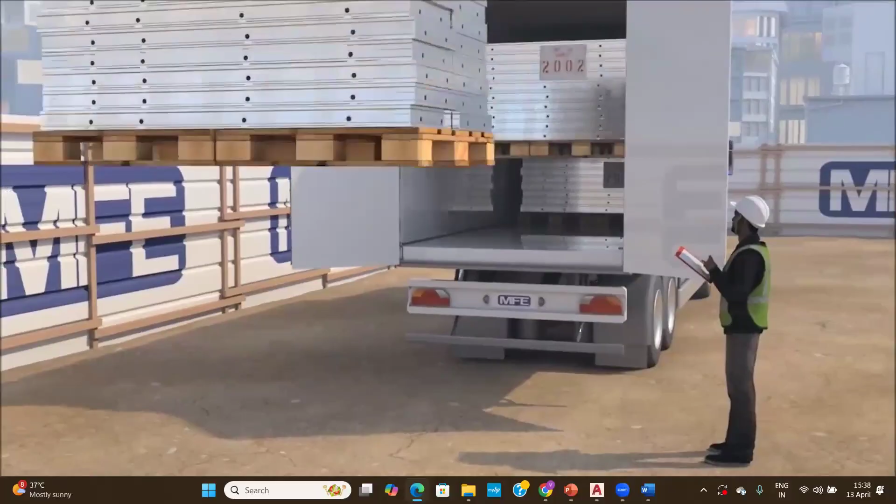I'll have one video. I think audio is not visible. Audio. Not running. Wait a minute.

Hello? Hello, hello, is it visible? It's visible, sir, but... Video, sorry, audio, yeah will be. I think there is an internet issue. Okay, continue.

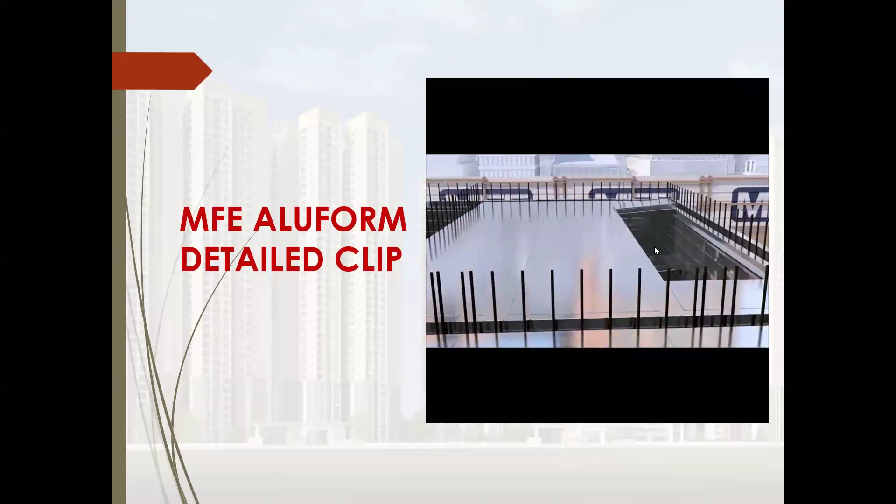This kicker will be 125 mm in length. That 75 mm with that bolt, that will go into the concrete, embedded in concrete, and another 50 mm level will be over the top slab, top level of concrete. That is the base of your next level, and the 75 mm will be embedded into this. In that kicker bolt, there will be a slot up to 25 mm. If you have any issues like 5 to 10 mm, you can adjust this kicker in that slot.

Am I audible, right? Yes, yes sir, yes, yeah. Okay.

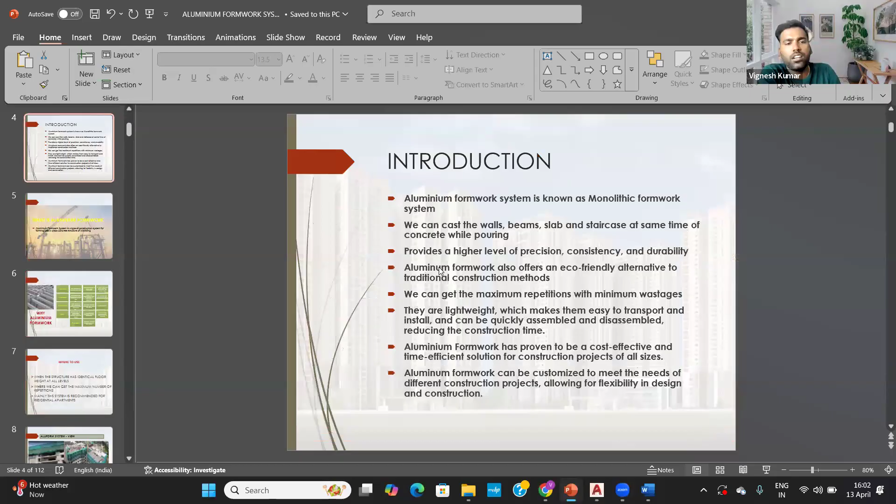As per our previous records, it gives 6 to 8 square meters in the book, but practically you can achieve 12 to 14 also.

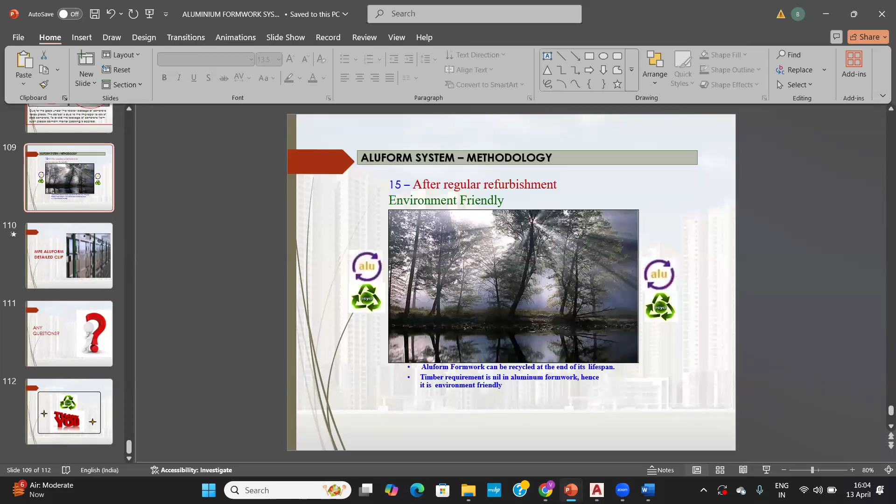Okay sir, I have shown those finishes, no? This is after 80 repetitions.

Yes sir, this wall thickness, will it be changing? We have 3 types of wall thicknesses: 160, 180, 200, and the elevational architecture wall is 400 mm. So below floors have more thickness, like basement 3, basement 2, basement 1, ground floor have different wall thicknesses, meaning 250. It's a shear wall framing system.

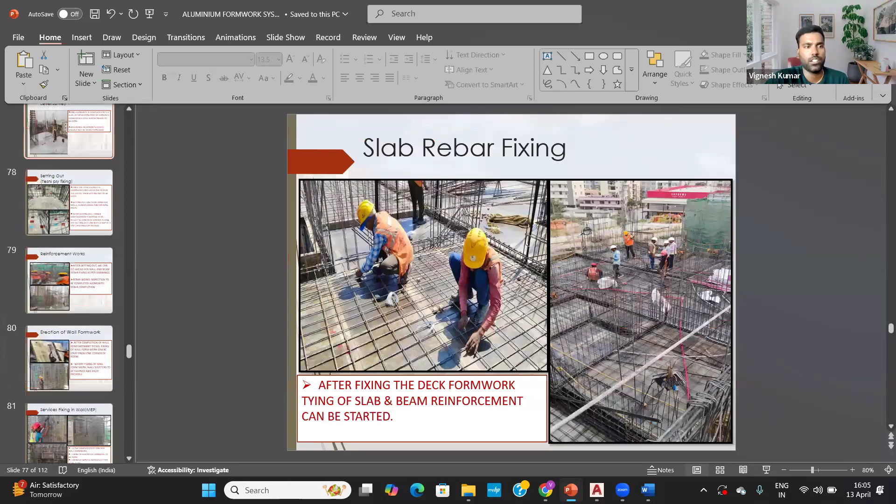So we have the transfer girder in the ground floor. We have done a transfer girder in the ground floor, then we started that aluminum formwork. I'll show you that image now. Sir, as we go above, the thickness of the wall decreases, right?

After the 7th, 8th floor, the wall is reduced from 200 to 180, and 180 to 160. Minimum is 160, maximum is 200 for us.

Here this transfer girder we have done. It's a 1.5 meter length beam, wide slab, and over there we have started our aluminum formwork. These lengths are this dimension, and this wall thickness is different - there are 300, 350, 400 and all.

Someone asked what? Someone asked something about refurbishment. I'll show you that refurbishment.

Sir, can we use Mivan in curved structures? Yeah, your Mivan panel mold itself can come in a curved way. You can do circular, curve, vertical, square, whatever shape you need, because it all comes as a machinery product. The machine will produce those panels. So whatever design or software they are using, whatever shapes you require, whatever drawing they give, the output will be the same.

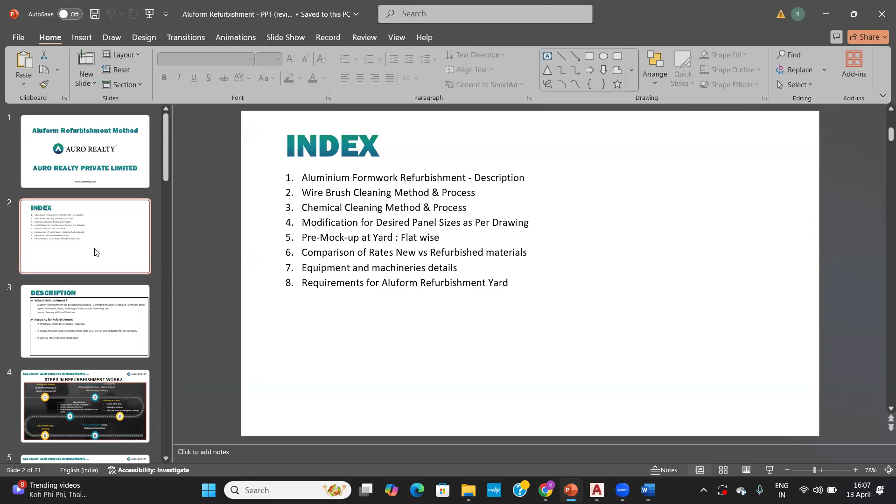Sir, in Mivan we are using shuttering oil, right? Any good company other than Image oil? There is no good or bad - it's up to your quality department, up to your quality. If the quality you are not getting, there is no use applying that oil and all.

There are certain releasing agents - many companies like Fosroc, Image, New Barrick, Palm Group and n number of releasing agent companies nowadays in this industry. But it has to be based on your quality. If you are getting good quality, there's no need to unnecessarily change your product. If you are not getting the quality, you have to choose the correct one - ask the vendor, call the vendor. For us, we called the vendor's technical engineer, he came to our company, I told my procurement, and they customized and provided a customized shuttering oil for us. There are binders that release and will not absorb concrete slurry, and some agents put for a smoother finish. It's all based on your product quality - if your product quality is coming good, you can go ahead with that product.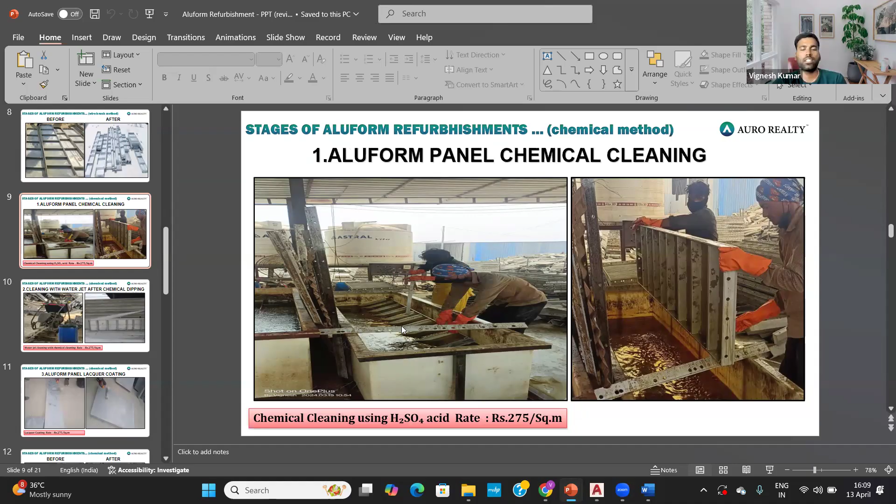They will do an acid wash using H2SO4. There is a tank - they put it in that dipping tank and it gets washed, and after that they do a water jet wash. We get that finish like this - see, before and after.

And again, we have to provide a lacquer coat over the soffit areas - whatever soffit material is there, we have to provide a lacquer coat.

One more question - Kiran Akula is asking why do we use grease for aluminum formwork?

Grease we have used in wall tie for smoother releasing of the wall tie. I'll show you the picture. So is it grease or oil? Grease - shuttering grease, not oil. Oil is for your releasing agent.

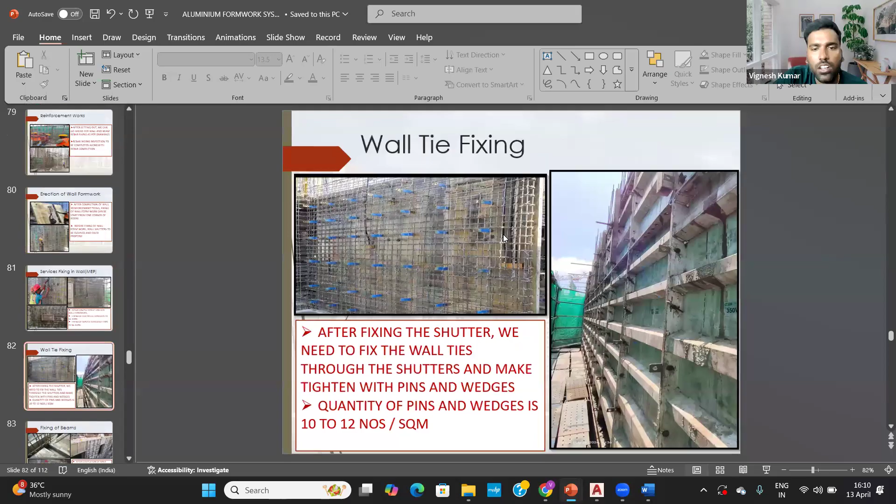See, here in the wall tie, there is a blue color sheet, PVC sheet. Between this blue sheet and the wall tie, we have to provide grease along the length of the wall tie. For example, taking this wall tie, I apply grease over that, then provide that PVC corrugated sheet - the blue sheet - and put it into the wall. Once the concrete is done, I remove the wall tie. What will happen is the plastic will remain inside the wall with the concrete because I applied that grease along with the wall tie, so my wall tie would not get stuck or stay inside - it will be removed easily. That's why we are using grease for wall ties.

You got it? Hello? Hello. You got it? You got the point? You got the answer?

Hello, sir. I have one question, please. Yeah. Sir, what is the distance between those blue ties? Sorry, distance between these blue ties. Yes. This is your panel length. See, this is my 600 panel. So it will be a distance between the two panels. Across vertically, if you are seeing, there is 150, 300 or 450 and then 600 equally.